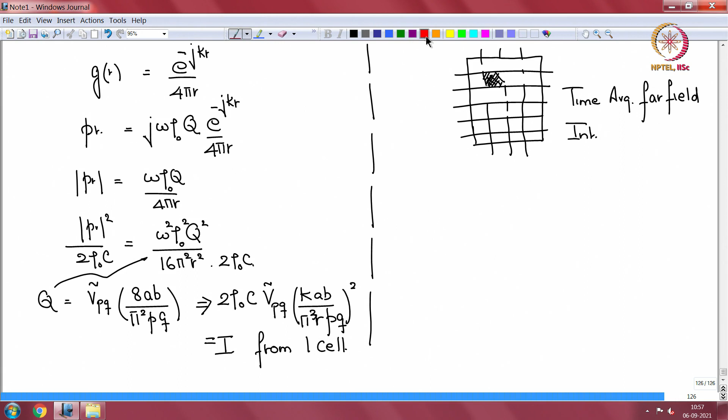If you recall, last class we were looking at sound radiation from a single cell of a plate or panel vibrating in a single mode, with a certain PQ. We looked at sound radiation from one cell and computed the time averaged far field intensity, that is, sound intensity. That is this expression from one cell. Now I will remind you of this.

So let me go back here: twice rho c magnitude Vpq squared, then KAB by pi cubed RPQ whole squared. Both are the same. So what the entire panel radiates, the intensity, is equal to what one single cell radiates, assumed as a monopole.

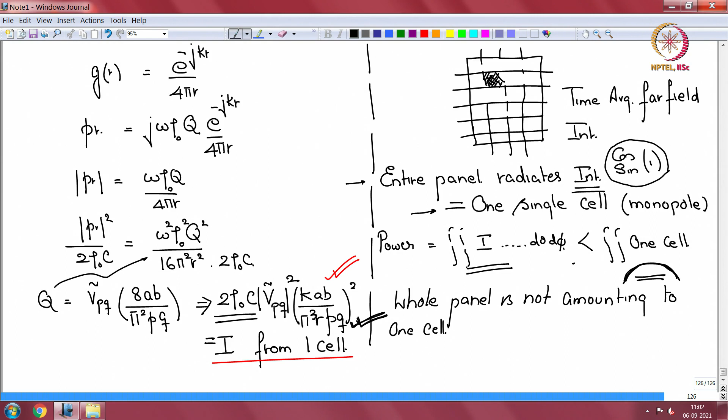So we took the maximum value. When we took the maximum value, the intensity was equal to what one cell radiates, but in actuality it is not maximum at all angles, so it will be less than that. So if you actually compute the power from the entire panel and compare it to the power from one single cell, what the entire panel radiates is less than one cell. So the whole panel is not amounting to one cell. That is the conclusion.

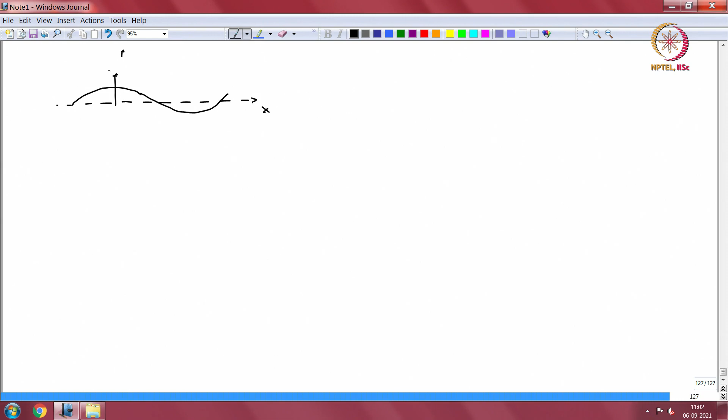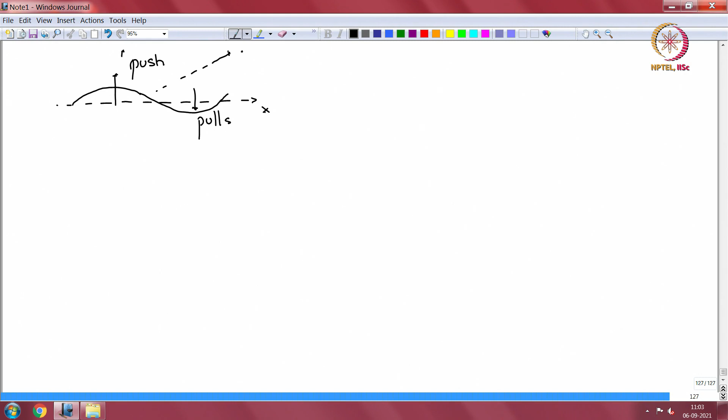So, what would that mean? At the very first cut, that is what it means. Let us say this is one wavelength on the panel, in the x direction, and it is radiating sound. So it pushes the fluid here and it pulls the fluid here, and that is how sound is radiated to some distance. Suppose the acoustic wavelength is this much, this is the acoustic wavelength.

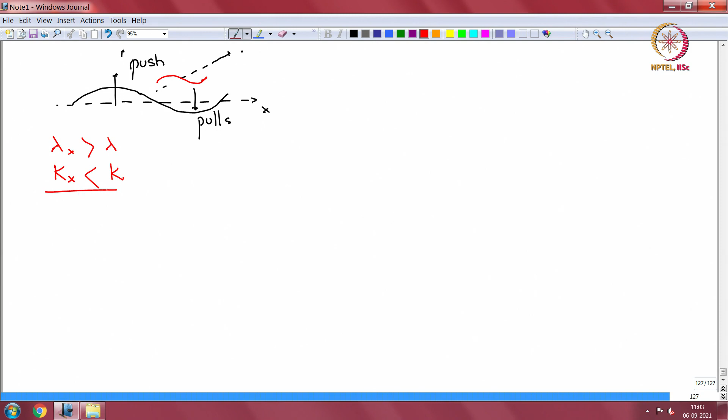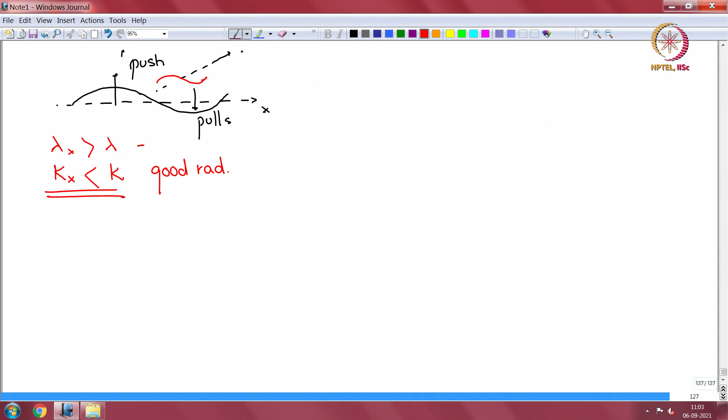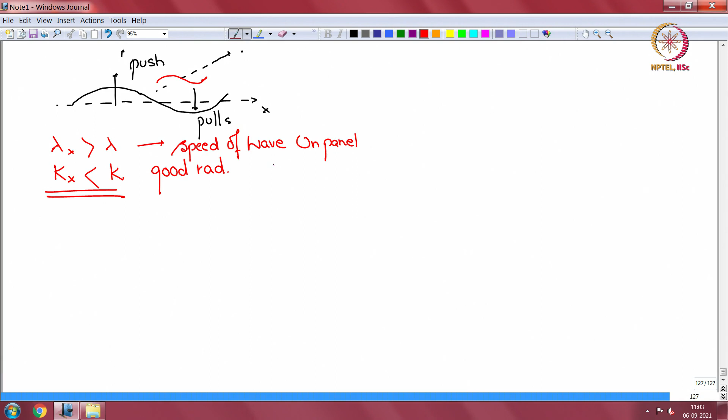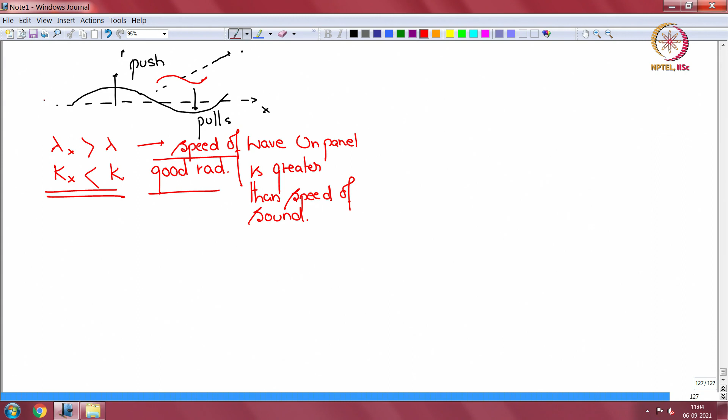That means lambda x is greater than lambda acoustic, which means kx is less than k, which is the condition for good radiation. This gave us the maximum at high frequencies. So lambda x greater than lambda means, in some sense, the speed of the wave on the panel is greater than the speed of sound in the medium. The panel wave moves faster than the sound wave in the medium. That is what this condition means.

In the flip side, what happens? Suppose the acoustic wavelength is bigger. That means structural wavelength is smaller, which means this time lambda x is smaller than lambda. So structural speed is slower.

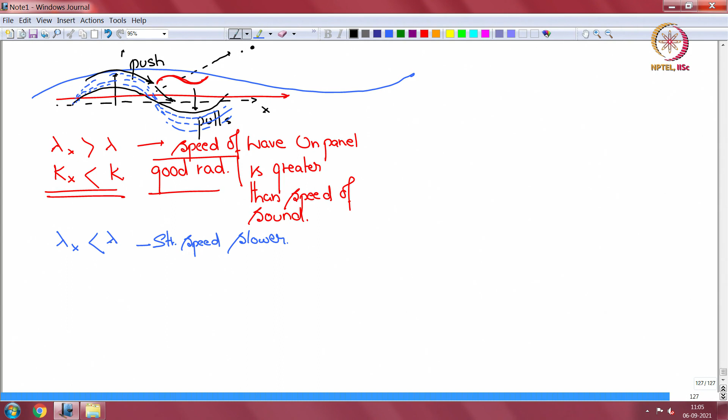Then what happens? As this structure starts to push and starts to pull, it is doing it slowly, in comparison to the speed of the fluid, and so the fluid will try to find an escape route. The fluid will try to find the path of least resistance and escape around the panel, and therefore at a distance the receiver point will not receive sound. There is a local cancellation, amidst the high regions and low regions of the panel, as the fluid escapes.

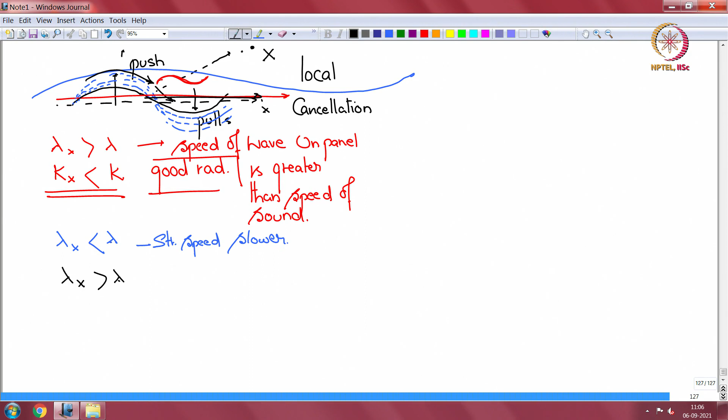In contrast, when lambda x is greater than lambda, the structural wave moves very fast and the fluid does not have time to escape. Fluid is slower in this case. So the structure pushes and pulls much faster than the fluid can respond, and so the fluid has to be compressed here and rarefied here, so that at some receiver point there is sound. That is what this means. We need a measure of sound.

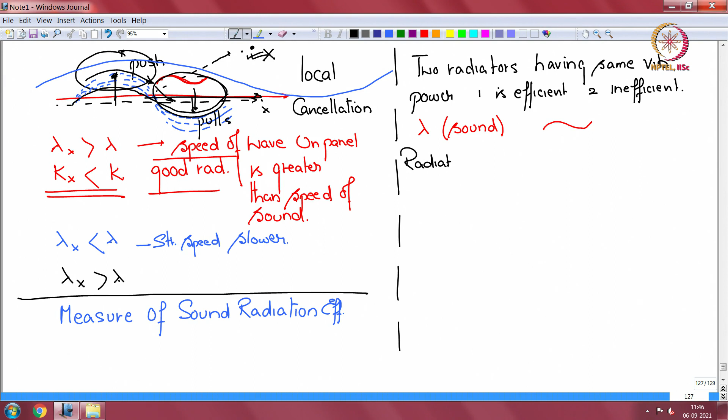So let us say that the wavelength of sound, lambda, the wavelength of sound is of this dimension. And there is radiator 1, and we will just plot the x directional vibration in the x direction. So let us say this is the x direction, this is the dimension of the plate, let us say this is A. So let us say the vibration is like this. Definitely the lambda x is greater than lambda, right. That is when the radiator is efficient.

And let us take radiator 2, and that is also having the dimension A, but this is lambda acoustic, right. So let us say its profile looks like this. So this happens to be the structural wavelength, definitely less than lambda. Now, it is possible that its vibrational power is equal, of 1 and 2 are equal.

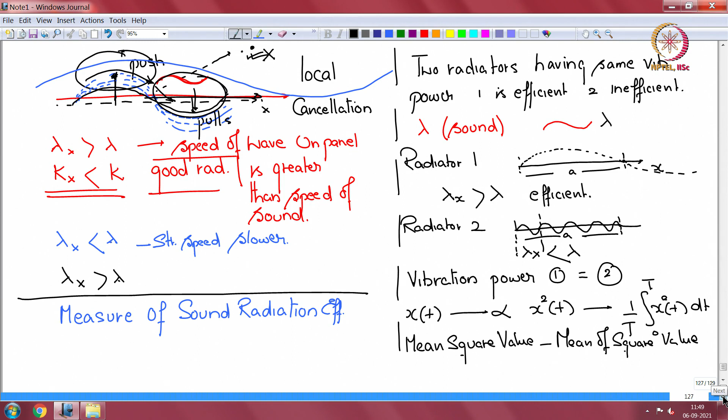Okay, so suppose I have a signal of this form: V tilde PQ sine P pi x by A, sine Q pi Z by B, cos omega t. This is the form of vibration on the panel.

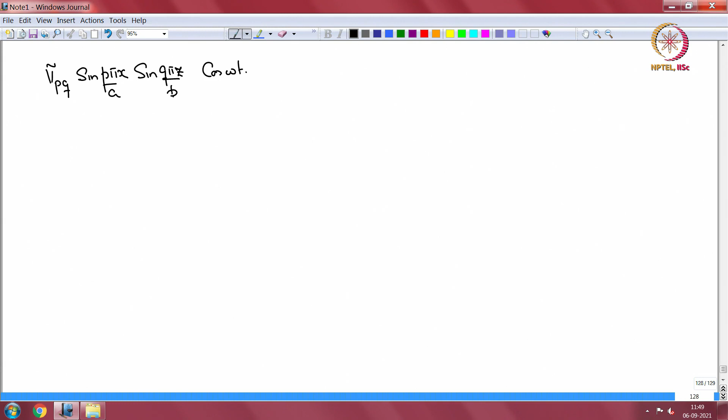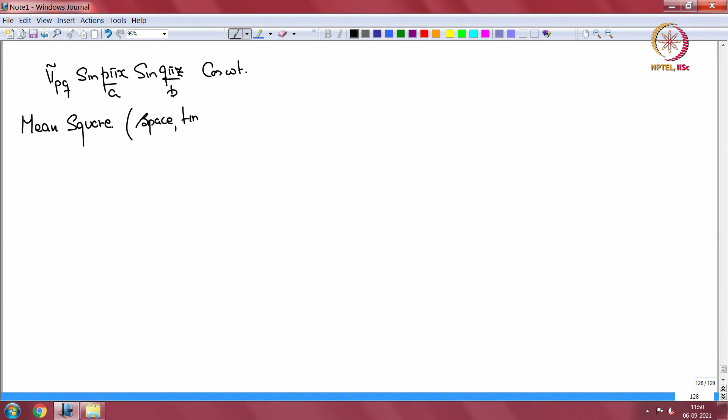So I'll do a mean square value of this, mean square value, but it will be mean in the sense of space and in the sense of time. So we'll indicate this as a mean square value, x, z and t.

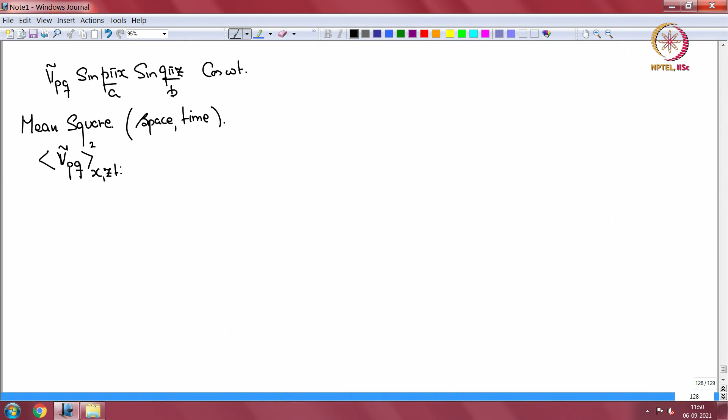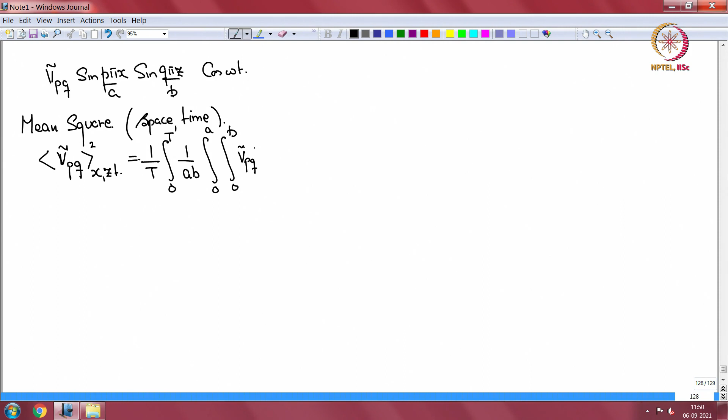So what will that be? That will be 1 over t integrated from 0 to t, the time period, then 1 over AB integral of from 0 to A and integral 0 to B, V tilde PQ square. We will consider this to be real anyway, right? Square, then sine square P pi x over A into sine square Q pi Z by B into cos square omega t, then you have dx dz dt.

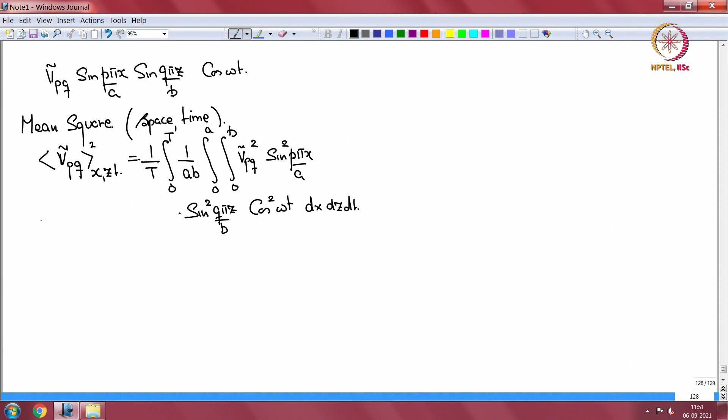Okay, t is equal to twice pi by omega. Panel is vibrating at omega frequency. So if you compute this, this is going to be equal to V tilde PQ square by 8. You get a half from here, you get a half from here, and you get a half from here, and you get V tilde PQ magnitude square by 8. Now that's your mean square velocity.

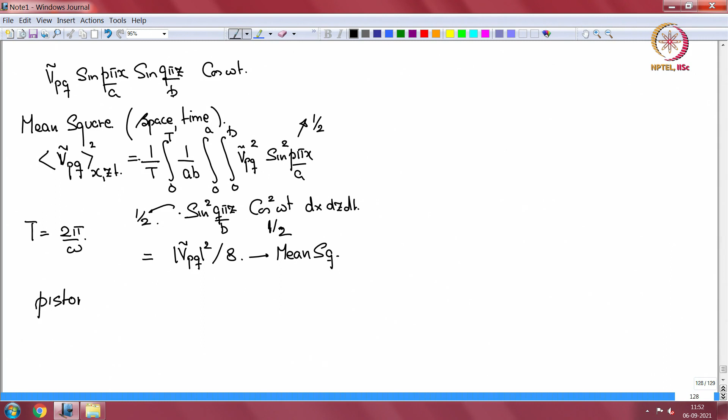Now what is a good radiator? So consider a piston, a circular piston, in a baffle, radiating with velocity Vn cos omega t, at high frequency, where it is most efficient.

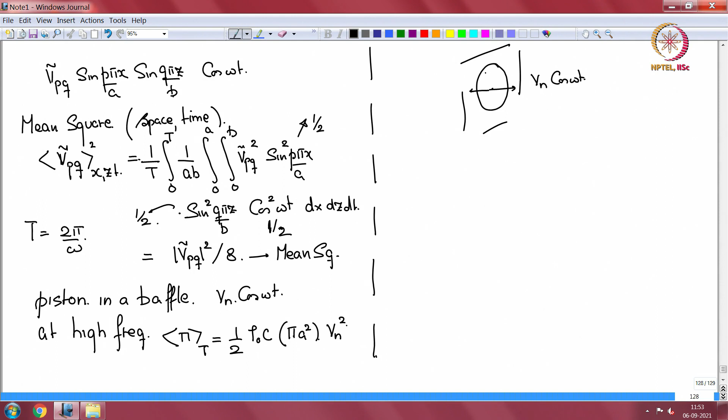The time averaged power is given by 1/2 rho 0 c into the area of the piston pi a square into Vn square, because there are no spatial variations as the piston vibrates. If you have a piston in a baffle, vibrating back and forth at Vn cos omega t, oscillating back and forth, Vn is uniform over the circular piston. There are no ups and downs as it happens in the vibrating plate.

So this is now the power, and this is the mean square velocity, mean square velocity only related to time. But now the panel has variations in space also, and therefore the mean square velocity is V tilde pq magnitude square over 8.

So now suppose we define a measure sigma, as the power radiated by the panel at omega, the averaged power, time averaged power, vibrating from a vibrating panel, as the numerator, and in the denominator we put rho 0 c, area — this area is the same as the area of the panel — and V tilde pq magnitude square over 8. So now this gives a measure where only cancellation is accounted for.

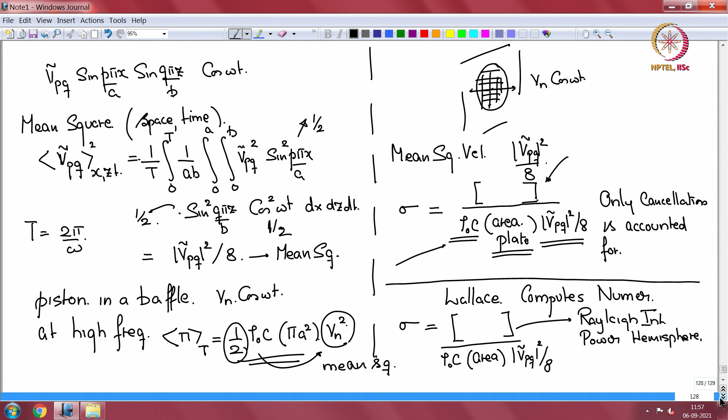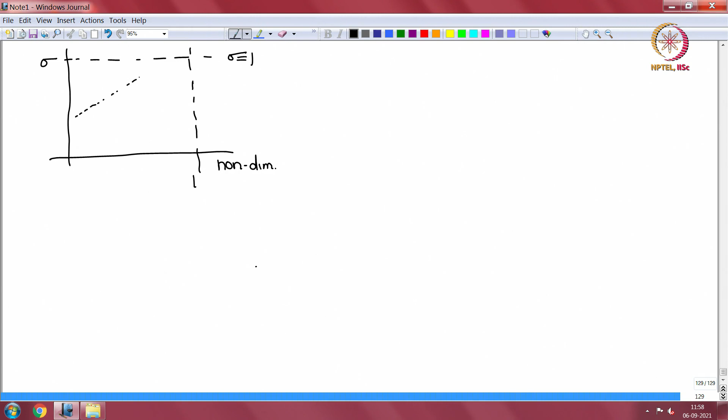If you do that and we plot, there is a non-dimensional frequency here which I will explain a little later. Let us say that non-dimensional frequency attains the value 1 here, and the sigma is plotted over here, then you will get these pictures. Radiation efficiency is 1, sigma equal to 1 here. So, you will get an increment with frequency, and something happens here, you can go above 1 also. You get these sort of pictures.

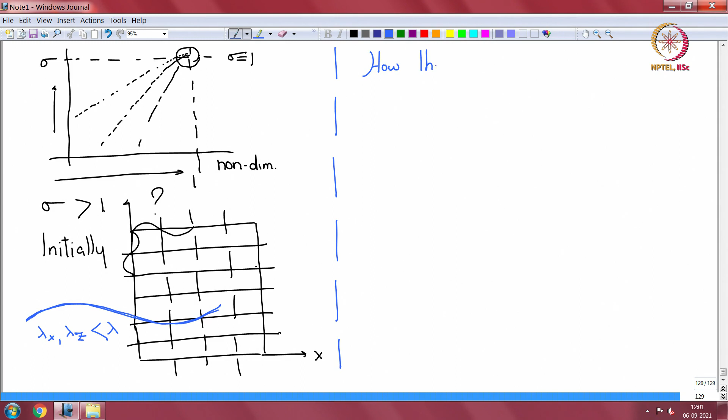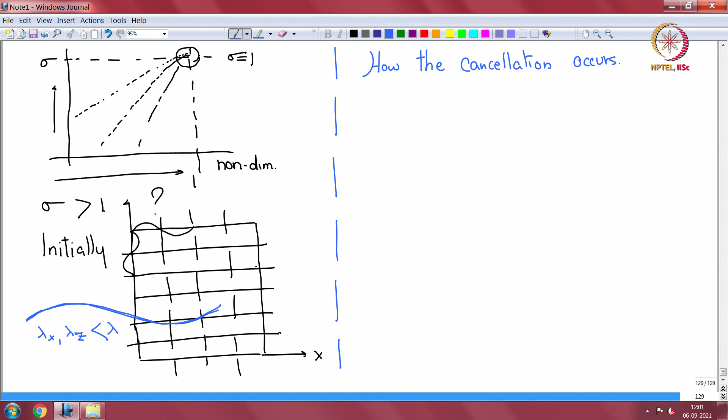So you can kind of see that this is the wavelength in the x direction, this is x, and that is z, and this is the kind of wavelength in the z direction. So you start off at low frequencies where the wavelength of sound is much bigger, and so cancellations will occur. So lambda x, lambda z, the panel mode wavelengths are less than lambda, the acoustic wavelength, and therefore there will be cancellations occurring of volume velocity.

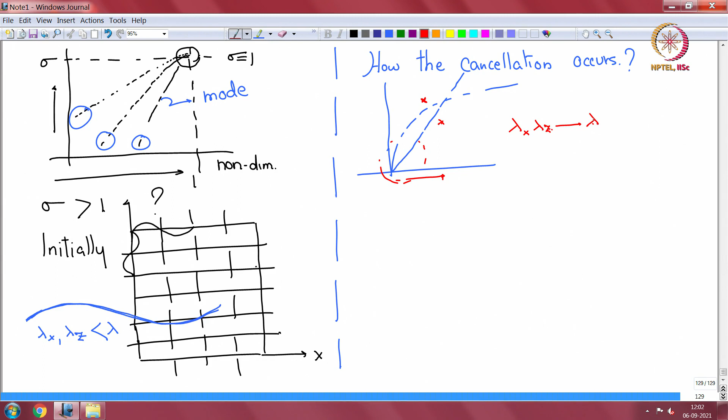How the cancellations occur, we will see again a little later. We will see a little later, but let us just say that cancellations do occur. And then so you are somewhere here at low frequencies, so you are not so efficient. These are modes, by the way, any particular mode. Now as frequency starts to go up, again the same coincidence picture starts to come in. Your acoustic wave number goes like this and your structural wave number goes like this, and you are somewhere in this region, where acoustic wavelength is less or acoustic wave number is less or acoustic wavelength is higher. And as you go up in frequency, the wave number behavior is square root omega and directly proportional to omega here. The same thing happens. So somewhere you will have lambda x and lambda z approach lambda, so that the cancellations are reducing.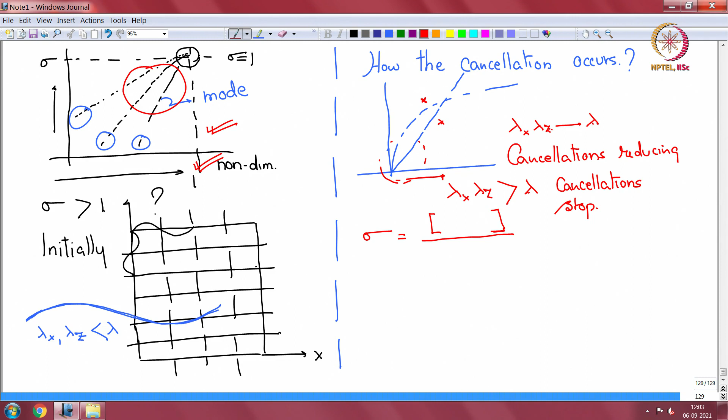So, it is the sound radiated in the far field by a single mode at a single frequency. The time averaged power radiated divided by the power radiated by a piston, a circular piston, when it is most efficient in the same medium, having the same area as that of the plate, and the same space time mean square averaged velocity.

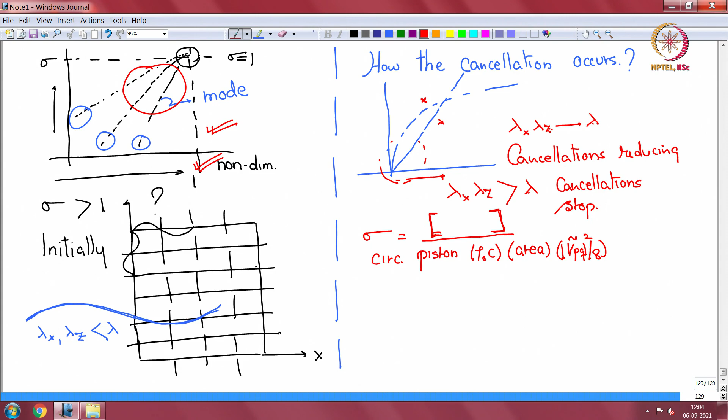So, we are out of time. We will continue from here and we will look at what is the cancellation nature. We will do that in the next class. Thank you.